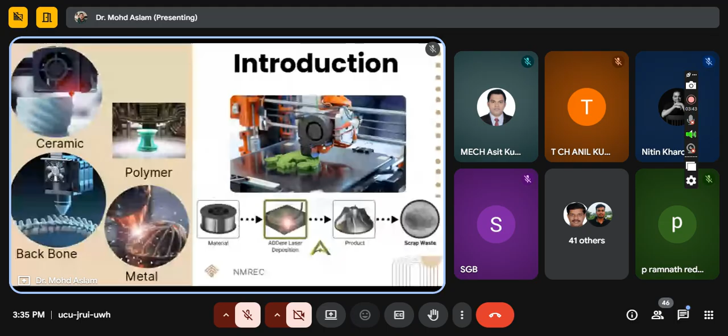Sir has left. Yes, sir. Maybe some issue there. Please wait for 1 minute. Maybe you will join.

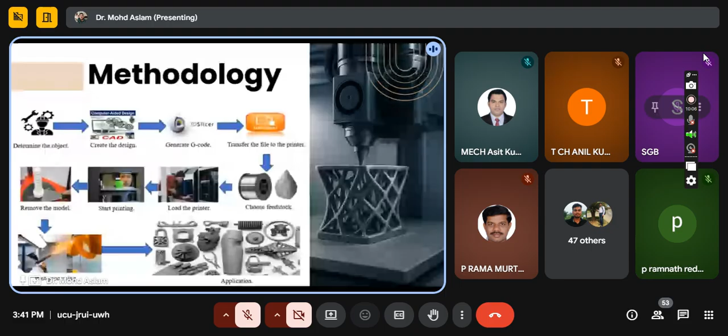After the printing, just remove the excess material which is undesired for the component. After this is the final product, just remove the unwanted material and we will get finished parts.

Various types of metal additive manufacturing processes are available, just like powder-based, wire-based, and others like ultrasonic consolidation and friction freeform. So what is powder-based? So many MMC powders are available, just like titanium carbide, silicon carbide, tungsten carbide, and silicon nitride. So many different types of MMC powders are available. With the help of the requirement of the component, we are using different types of powders.

And also nowadays we are using different types of bimetallic components to get the desired properties of the material. We can proceed according to that. And here in metal additive manufacturing, we can categorize into powder based, wire based, and other.

Just like in case of powder based, there you can see laser based and electron based methods, we are using these for powder based. And here for wire based, arc based deposition, electron beam, laser beam are also used for wire based.

And in case of what is arc based? Arc based is basically just create an arc using any means, so as to melt the material and deposit them. So this is the arc based.

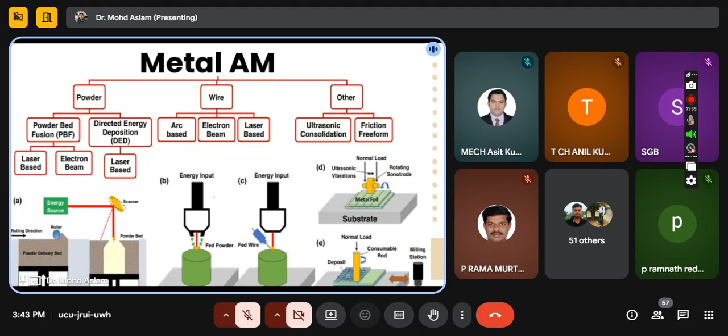So another one, this is metal. Again, we can classify it into two types: fusion based and solid based. So here we have fusion based, which we can further characterize into two parts, just like indirect energy deposition and directed energy deposition.

So for directed energy deposition, for example gas metal arc welding, and indirect deposition is powder bed fusion method. So here with the help of a figure, easily we can understand how it will work.

So in this case, two to three things are there: electron beam based and laser beam. In case of directed energy deposition, laser beam, wire arc, and electron beam. And here solid state, just like additive friction stir deposition, just like friction stir welding.

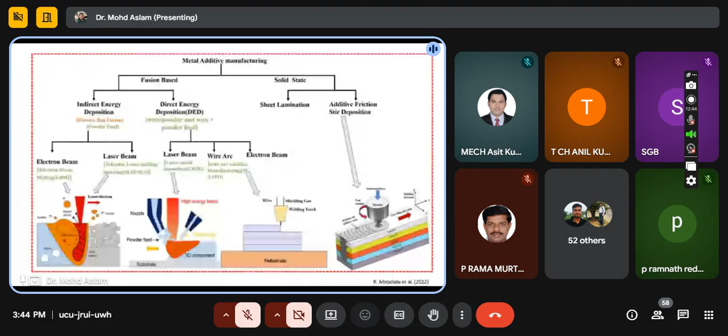So what are the applications of additive manufacturing in industry? Nowadays, a lot of applications are there, just like we are using additive manufacturing techniques in biomedical sectors and aerospace sector and marine industry, and also here architecture, academic institution, military, medical, and also industrial machines, and lot of automotive parts are there, which we can fabricate with the help of additive manufacturing techniques.

So here the major concern is maximum utilization of the additive manufacturing sector according to industrial adoption of additive manufacturing, industrial machine, and after that aerospace industry. So these two industries in industrial adoption of additive manufacturing we are using frequently.

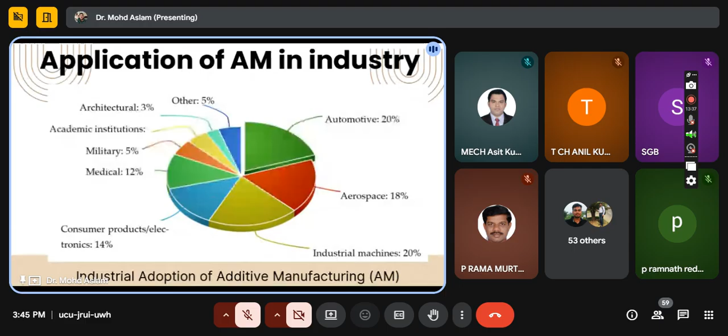So nowadays, up to 2024, it was used frequently. Nowadays powder bed fusion method and wire arc additive manufacturing are more recent advancements for the fabrication of any metallic component in three geometrical shapes of object.

So various things are there, just like we can, with the help of additive manufacturing techniques, we can repair with the help of additive manufacturing techniques. We can repair the component also, just like cracks in planes, corroded parts of aircraft, broken turbines and ships, and corroded parts of aircraft and cracks in planes. So with the help of additive manufacturing process, we can repair it.

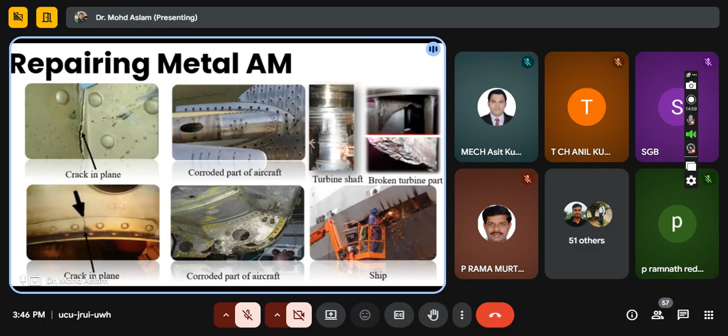And also as per the desired properties, we can use a bimetallic component and we can fabricate it. After that, as previously discussed, powder bed fusion method is frequently used nowadays for the fabrication of metal based, ceramic based, polymer based components.

So this is the working principle of the powder bed fusion method. A laser beam strikes the powder surface, and based on the CAD model, it fabricates the components. With powder bed fusion, we can fabricate metal-based, ceramic-based, and polymer-based components.

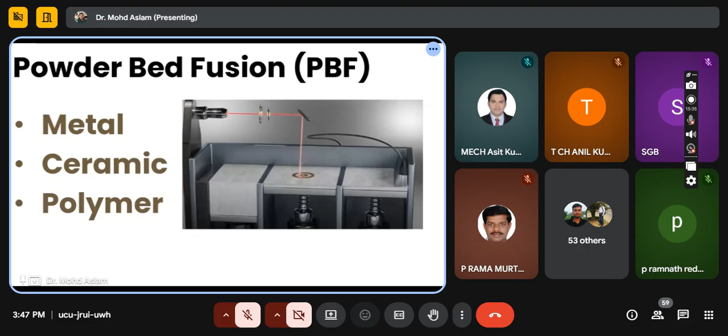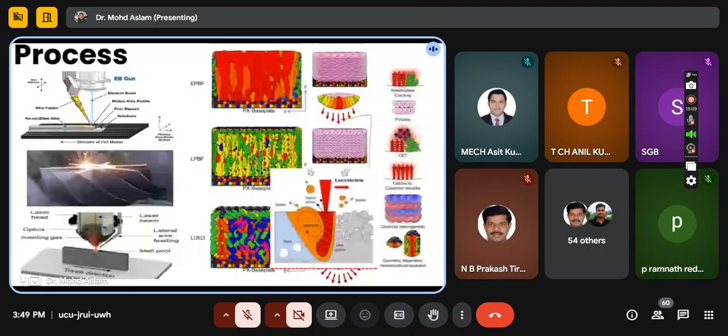Here I'm also showing some applications of how to repair. We can repair shafts, turbine blades, and also ship hulls. Lastly, we show how we can convert a failed component into a final product with the help of additive manufacturing techniques.

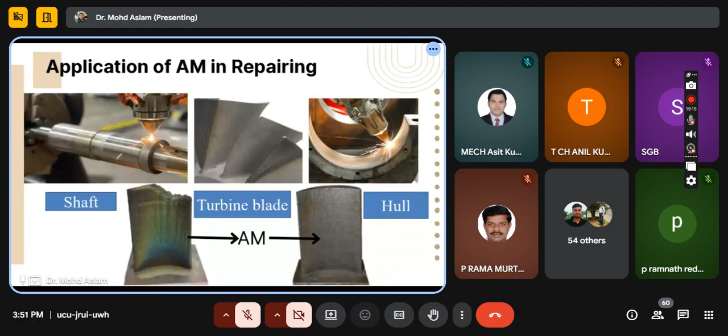Now we can discuss the failures in metal additive manufacturing process, as we have seen in figures. When we use silicon carbide in a maximum percentage in any metallic component, due to the higher percentage of silicon, it develops iron silicide in the microstructure. This iron silicide does not form proper metallic bonding with the materials, so it develops cracks during the hardness test.

We have also observed porosity. How and when is it developed? When we directly deposit silica or any MMC powder on a metallic surface, we observe that it produces porosity, micro holes, as well as macro holes. For example, silicon carbide deposited on a mild steel substrate will develop porosity and micro holes. So these can easily develop.

So how can we avoid this? First of all, we should use a good additive material with the help of MMC powder. Easily we can develop a metallic component with the help of the additive manufacturing process. Also, when using a higher percentage of any MMC powder in a component, it produces premature failure.

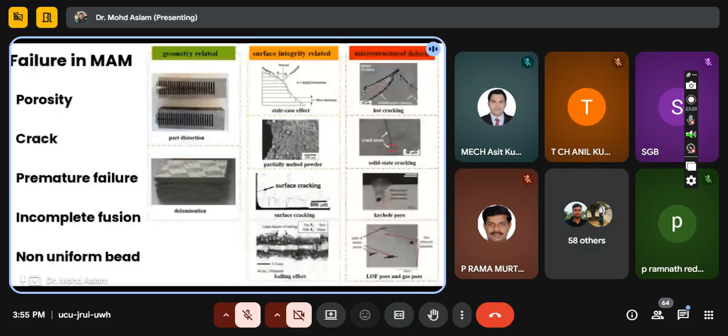Here are some failures and how we can improve or repair them. Some components I am showing here. First of all, we are talking about the engine block, where we are using titanium and aluminum.

Both are dissimilar metals. As per the requirement of the material, if the failure is towards the titanium side, we definitely use titanium, and if the failure is towards the aluminum side, we can repair it with the help of aluminum in the engine block. After that, one shaft is there - we are showing one shaft and failure in the shaft.

We can repair it with the help of wire arc additive manufacturing process. After that, failure in gear is also shown, and how we can repair it with the help of laser additive manufacturing.

We can improve and regain its original shape. Also, with the turbine blade, using laser additive manufacturing process, sometimes what will happen is the diameter of the shaft will reduce.

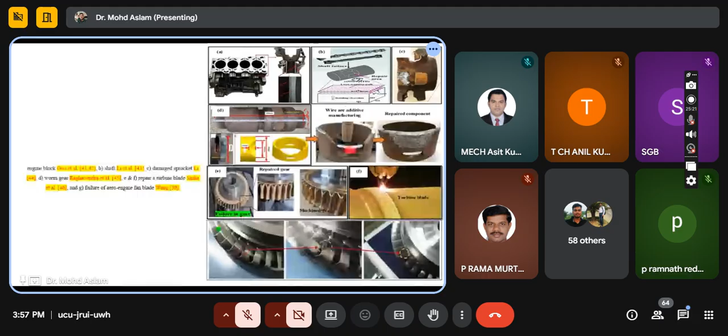So what are the part repairing issues in additive manufacturing? Different types of part repairing issues are there. In case of metallurgical issues, there is element dilution and mixing, brittle intermetallic compounds, and also solidification cracking and segregation.

In mechanical and structural analysis, we have observed residual stress, distortion, delamination, weak bonding, micro hardness variation, fatigue, and wear mismatch. As for thermal issues, there is coefficient of thermal expansion mismatch, differential heat absorption, and remelting of the base alloy.

After that, what are the process issues? Porosities, lack of fusion defects, poor wettability, oxidation, contamination, and process parameter optimization issues. In case of service performance, the issues are similar: porosity, lack of fusion defects, poor wettability, oxidation, contamination, and process parameter optimization.

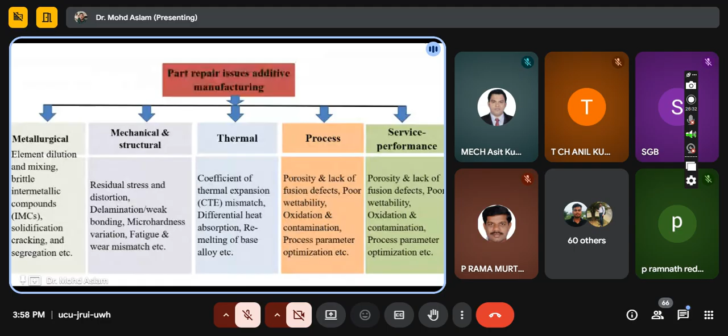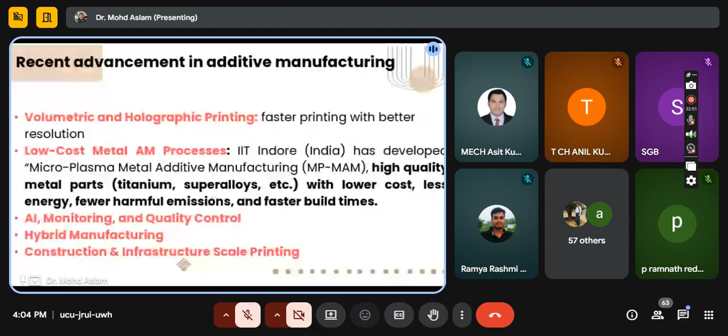So hybrid manufacturing, and after that, construction and infrastructure scale printing - these are the recent advancements in additive manufacturing process. After that, what are the future research directions in additive manufacturing process? If we are talking about materials, nowadays bimetallic, different bimetallic components.

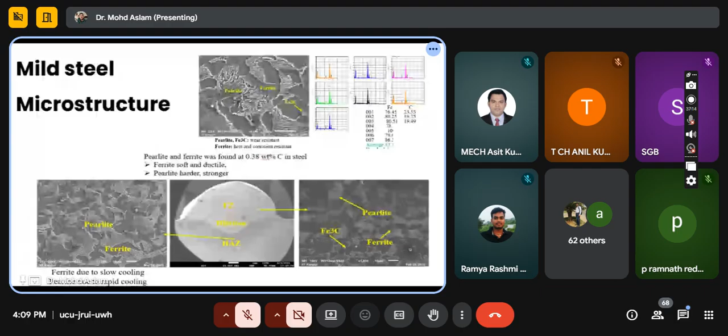So after that, we used steel material like 304 on mild steel. We can easily see the dilution at the cladding interface is minimal compared to mild steel. Why? Because in case of mild steel, when I develop a mild steel clad layer on mild steel, both have the same thermal conductivity as well as the same melting point, so it doesn't create much disturbance in arc generation - it melts properly and dilution was more.

But in this case, the mild steel thermal conductivity is different from steel thermal conductivity. So at the same welding voltage, and since the melting point of steel is higher compared to mild steel, it developed lesser dilution in the central portion. At the end of the cladding we also observed sometimes very minimal metallurgical bonding formation at the cladding interface. So the problem is two things: one is incomplete fusion, the other is the cladding interface issue in mild steel.

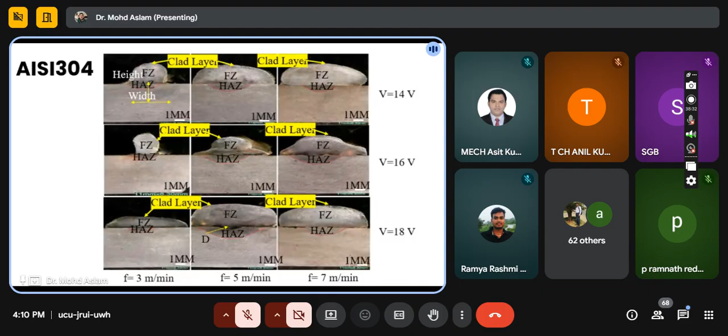Now I face another problem - to develop a layer on a mild steel surface, it was creating incomplete fusion as well as less dilution. So how can we resolve it at the same parameters? Further, we have also seen some incomplete fusion in the first one, and some material here too. In the EDS analysis, the iron percentage is higher in the substrate region, like the mild steel, compared to this one.

So my purpose in showing this one is because I want to identify the clear reason of the things. So after that, what are the...

Microstructure problems - so here at less voltage, we have observed that grain growth size is more because of very less dilution time. Grain growth size is more as compared to higher voltage, because when melted at higher temperature, it will take proper time to regain this microstructure in proper manner.

So that's why at less voltage we have found higher grain growth, and of course columnar dendrite structure in the cladded region. After that, we have taken a multi-layer clad on a multi substrate, and I observed that sometimes dilution will be higher and sometimes lower. So further I investigated these things and resolved further.

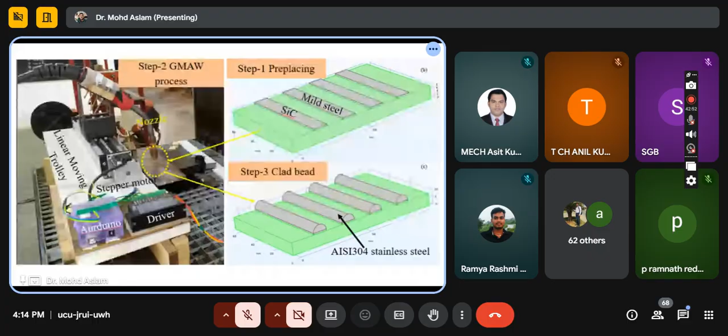After that, you can easily see it is showing clear less dilution. This is less dilution, but it developed end to end dilution and proper metallurgical bonding formation. That's why the incomplete fusion problem was solved as compared to the previous one, which had lesser wear resistance and corrosion resistance.

Now we are using silicon carbide. Silicon carbide is so hard as compared to steel. So here hardness improves, corrosion resistance improves, as well as wear resistance improves.

And now some power fluctuations are also there in case of different wire feed. Here I am using two different wire feed rates - 5 meters per minute and 6 meters per minute. We can easily observe that in case of a lower feed rate, the power input was more. So when power input is more, the melt temperature will definitely be higher.

Now in the cladded parts with the help of silicon carbide with steel, we can easily see uniformity is also there, not much element distribution failure. It was diluted properly - silicon carbide diluted properly with the help of steel. That's why we can say silicon carbide is a good additive with steel, but in limited quantity, not a higher percentage. A higher amount of silicon carbide will produce silicide, which causes premature failure.

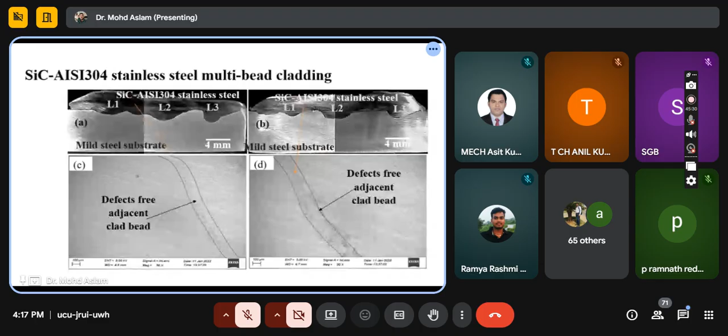So here some of the Vickers hardness is also conducted, but we have observed that the red color is showing 6 meter per minute, and the upper black one is showing 5 meter per minute. The problem is, what happens in case of silicon carbide when we use a maximum percentage, more than 3%, 4%, 5% with the steel matrix on mild steel? It developed cracks when we conducted the hardness test, easily during the indentation. Also, the diameter of the indentation will be more, and that time hardness will reduce. In the red color, the hardness is near about less than 300. So this is the cause of maximum amount of silicon carbide.

Also in case of silicon carbide MMC with the help of steel on mild steel, chromium carbide and some iron carbide tend to improve the hardness and wear resistance. So here I have conducted some wear analysis with the help of our cladding manufacturing technique.

We have observed that in case of mild steel, the wear rate is higher as compared to steel, and also silicon carbide MMC, silicon carbide and steel MMC. Easily we can understand that steel improved the wear resistance, corrosion resistance, along with hardness also. But in case of using silicon carbide with steel, it developed more wear resistance as compared to steel alone.

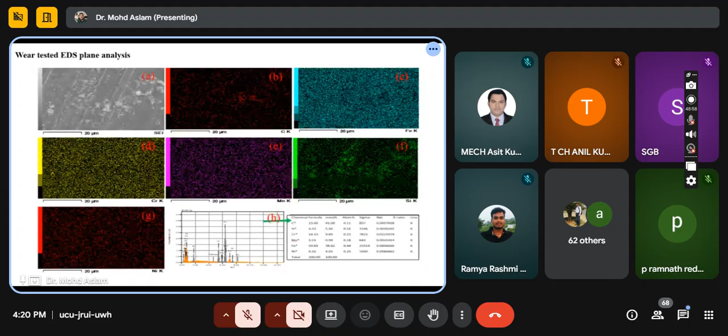So after that, in the final conclusion, we observe that when we are using mild steel on mild steel, dilution will be more. That is okay, but in the cladding portion, dilution will be minimum, so less metallurgical bonding formation occurs. So improving things like wear resistance, corrosion resistance, as well as hardness, it was using stainless steel and developed.

So I calculated and found the problem, just like less dilution. So here I resolved the dilution issue at the end portion, as well as how we can improve the wear resistance and corrosion resistance when dilution will be more. Then I tested, as previously discussed, corrosion resistance more, wear resistance more, as well as dilution more. Maximum dilution is not the matter, but dilution from end to end matters. So I found end-to-end dilution also. So successfully I initiated one problem and solved it.

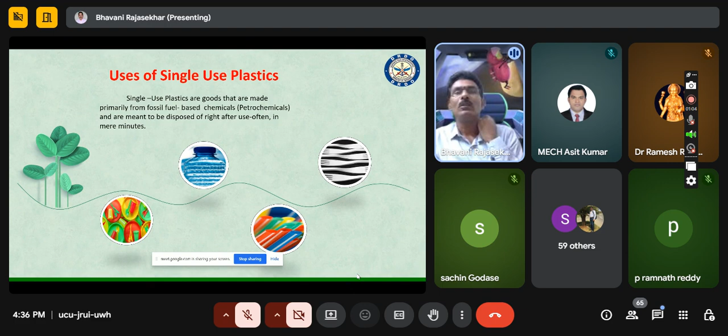With this, what is happening is there's a lot of impact on land, ocean, animals, ecosystem - it is spoiling. Because of that, cows and other animals, by eating these polythene carry bags and things, they are dying. That made me start some innovation for making an alternate solution especially for polythene carry bags.

If you see the plastic waste management rules, first we throw the plastic products, we have to collect it, segregate it, and go for recycling process. But if you see the polythene carry bags, the government made it mandatory that minimum 120 micron thickness is required for plastic carry bags, because once thickness is more, it's easier to do the recycling process.

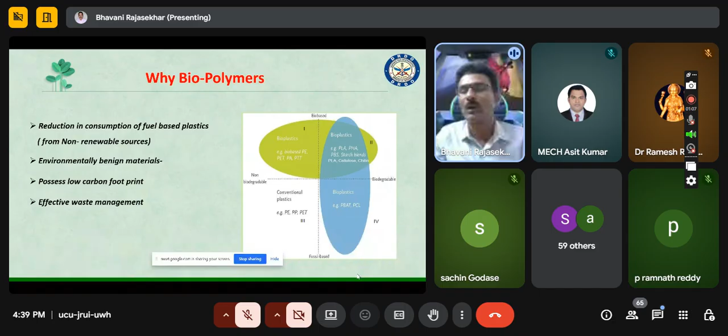That's why we have to judiciously take a call - where I should not have very poor strength, where I should not have high degradability and all the issues, but if it doesn't have strength, then it will be a problem. That is where I have done a lot of literature survey to see the biopolymers which are best for carrying the weight as well as degrading.

So the first best option is polylactic acid - this is one of the biopolymers. It has very good strength, but elongation is only 4%. Impact strength is good, everything is good, but the problem is that it has high cost - approximately 400 rupees per kilo.

See, polythene bag will come only for 120 rupees per kilo here in our market. If I sell any product at 400 rupees per kilo, nobody will purchase it. That's why, though I've considered it, this is not the correct material for our application of making the carry bag.

Second option I have gone for is starch - this is one of the best materials. We found that we are taking cornstarch, and from the cornstarch we are making the material so that it will be useful. At the same time, cornstarch will undergo degradation in natural ambient conditions.

Second is - the third one is cellulose. There is one difference between cellulose and cornstarch - cellulose cannot be digested by humans.

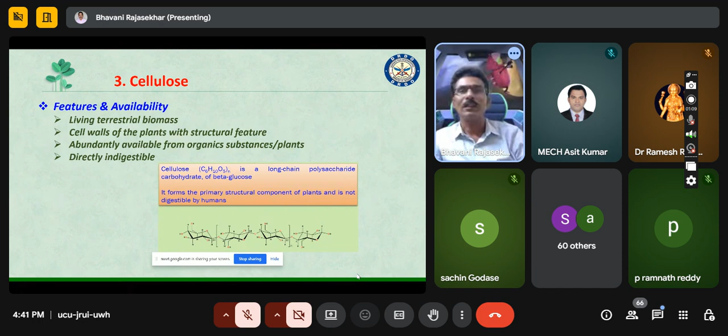Cellulose can be digested only by animals, whereas cornstarch is digestible to humans as well as animals. That's why instead of cellulose, we have taken cornstarch as one of the best materials.

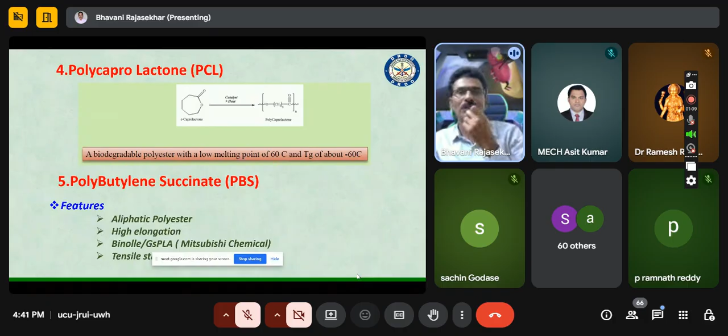Other materials I've seen like polycaprolactone and polybutylene succinate are very good in biopolymerity, but they can sustain only from plus 60 to minus 60 degrees. They cannot go to high temperature, up to 80 or 100 degrees.

That's why I haven't selected those two materials for our application. So finally, I selected polybutylene adipate terephthalate, PBAT. This is basically extracted from petroleum byproducts, but it's a 100% biopolymer material with very good elongation and considerable strength compared to polylactic acid, but at a lower cost. That's why we selected this as one of the materials for making the carry bag.

Now my focus is first to make a carry bag, because if you see the pollution in our country, the most pollution happens due to carry bags. Second is water bottles. My idea is to first replace carry bags, then subsequently water bottles.

So for that, this is my design of the product. The material should be a replacement for single-use plastic carry bags. It should be eco-friendly and should not cause any harm. It should not contain any plastic. No harm to animals and aquatic life, even if thrown in water or soil. It should be degradable by bacteria, have good strength and good elongation, should be printable in many colors, and finally should be cost effective. These are the design parameters for the product.

I made it, then we tried one by one. Whenever we do any solution, first we have to see what the existing solution is. If you see the existing solution, it's polyethylene, which has a lot of problems.

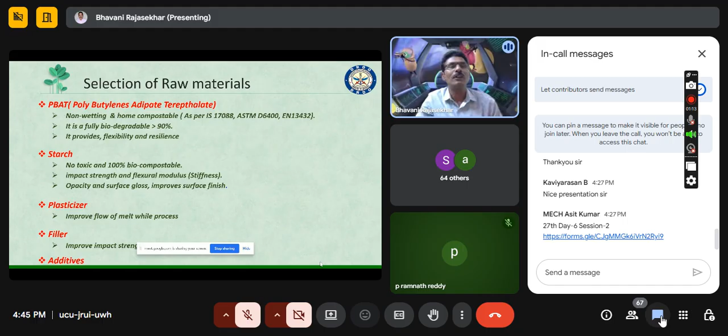The same thought came to my mind. This biopolymer PBAT has to undergo degradation, meaning I have to add some bacterial agent. That bacterial agent is nothing but cornstarch, so that it converts into compost. We made so many trials, and finally we came to a solution that is workable, so I was able to go for making the product.

Okay, first I made some films to make the carry bag. At the laboratory level, you can mix the material solution and pour it onto a glass metal sheet.

Then after that, we make it in the form of film. Those films I made and studied. Finally, I got very good degradability because of the cornstarch presence. So it is degraded, and these laboratory tests are completed.

But whenever we make any material at laboratory level, it is not sufficient. We have to go to industrial level. So the same combination I have taken to make it in the form of granules, which I want to use for large quantity production of the film.

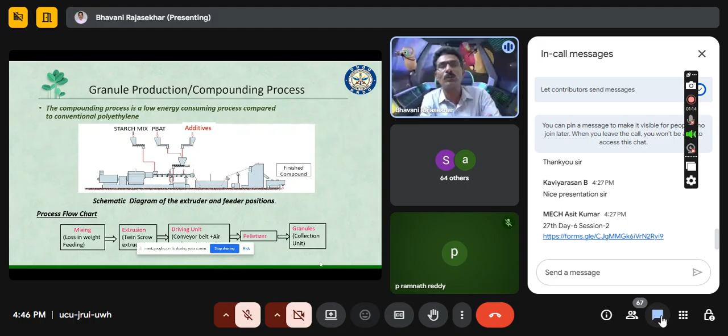For that we have taken a twin screw extruder. At the top, I am mixing cornstarch, PBAT biopolymer and additives. This is a high speed twin screw extruder where it will be melted, heated, and come out in the form of extrusion wire. This is the first process, where we made it into granules.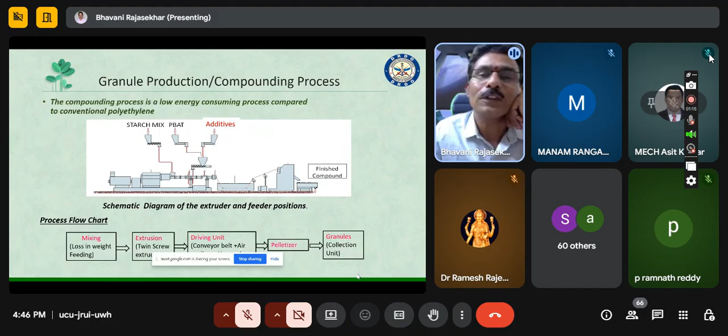Once I make the granules, I have to make the film. To make the film, we go for the blowing process. This is nothing but taking those granules and pouring them into this machine. It will blow the air from the bottom and generate the film in cylindrical form.

The film is blown in a cylindrical fashion. The diameter is D, which is nothing but the width of the bag. We are rolling that and taking it in the form of a roll.

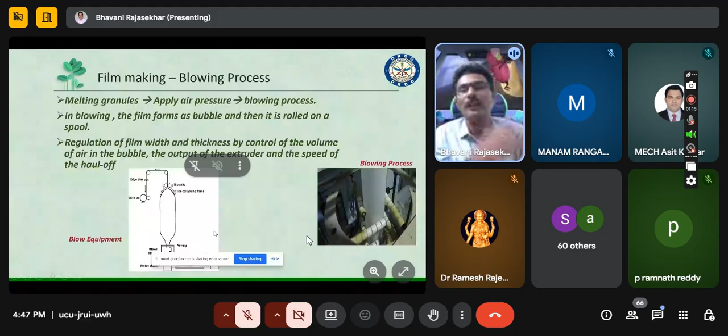Once we have done the rolling process, on top of that we have to do printing. So we get the printing and design, whatever may be the thing, like a normal printer where we have the ink and send the film roll through it to get whatever fashion of prints needed. After getting this, at every stage we have done quality control and quality assurance.

At raw material level, we have tested moisture content, viscosity, ash content, density, and melt flow index. In process parameters we have done testing, and for the final product we checked whether the bag has good strength, elongation, and uniform thickness. All these parameters we tested at laboratory level and found the quality is okay on various raw materials and products.

Once we made the product, we should test whether it will convert into compost or not. For that, the IS 17088 standard specifies how a material will degrade and what composition it has using DSC and FTIR analysis. We also checked carbon, hydrogen, nitrogen, sulfur, and oxygen content to check for pollution.